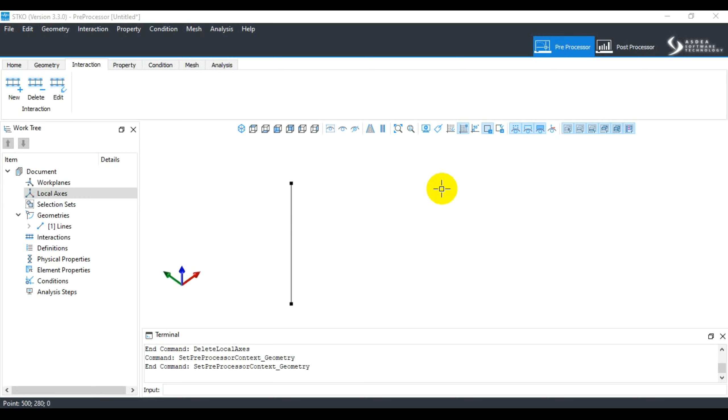Everyone. In this video, I continue the lecture series on STKO that I have started. And up to this point, I have covered the home tab, the geometry, the interaction. I also have done some discussion on the preprocessor module overall and post-processor.

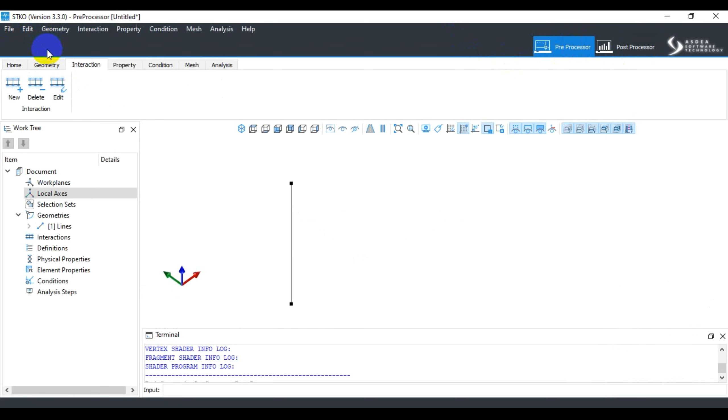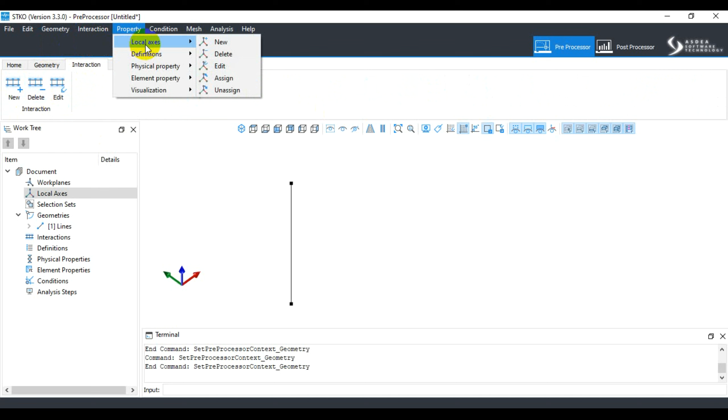However, this is now a detailed discussion on the STKO, and I have covered all these options, and some of these options are also covered in the discussion as well as this one. Now I am discussing the local axes, sorry, the properties module. And in the properties module, there are a lot of options available.

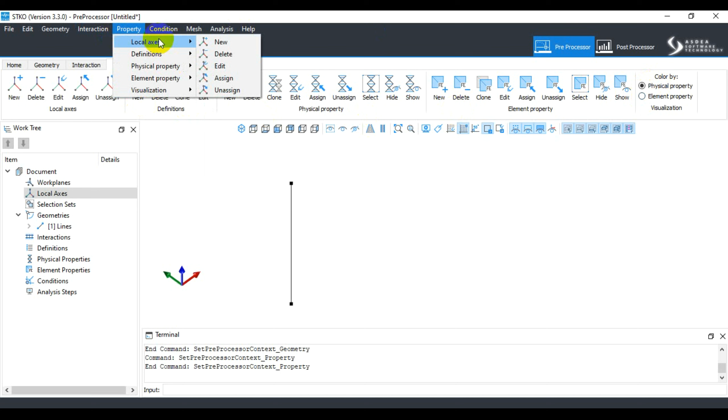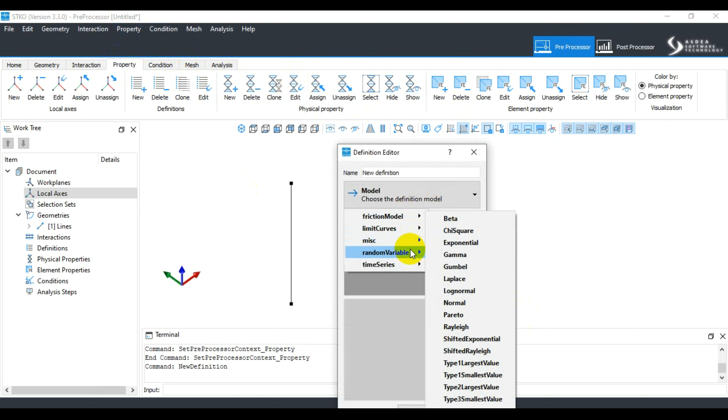And if we look at here, it is divided into five main sections: the local axes, the definitions, physical properties, element properties, and visualization module. So I will try to discuss them one by one, but at some points we have very detailed discussions on a lot of models, and it's very difficult at this stage to cover all in detail.

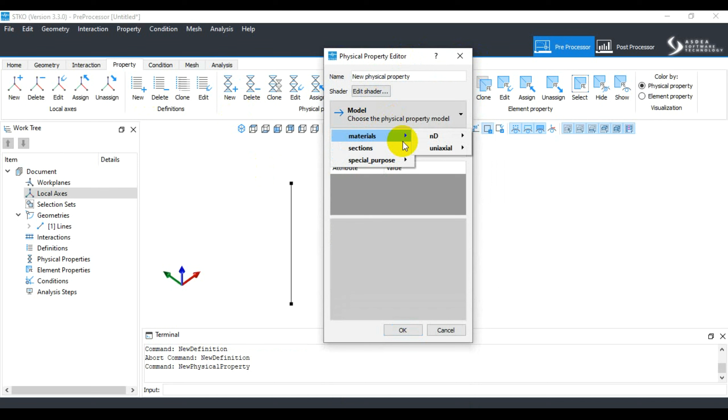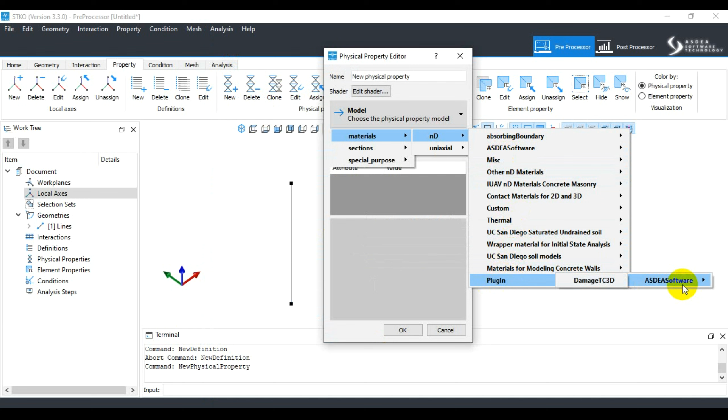So I will just give an idea, and after that I will try to cover them in the next video series one by one. Because if you focus on the material sections, we have so many details that are necessary to cover, and it's more than enough at this stage to consider them. So I will only discuss them, and then when I'm doing practical projects in this series, I will try to cover them one by one.

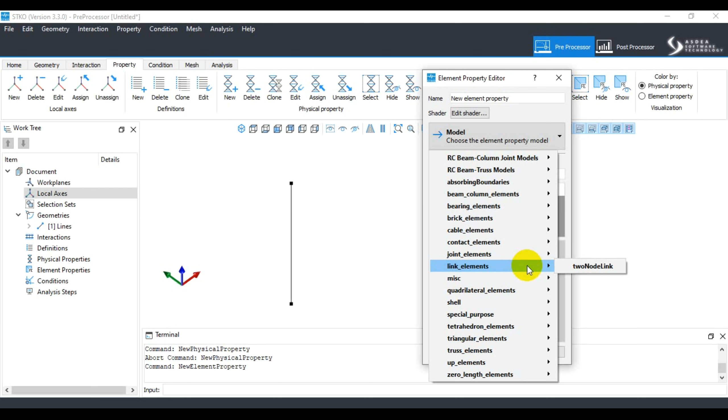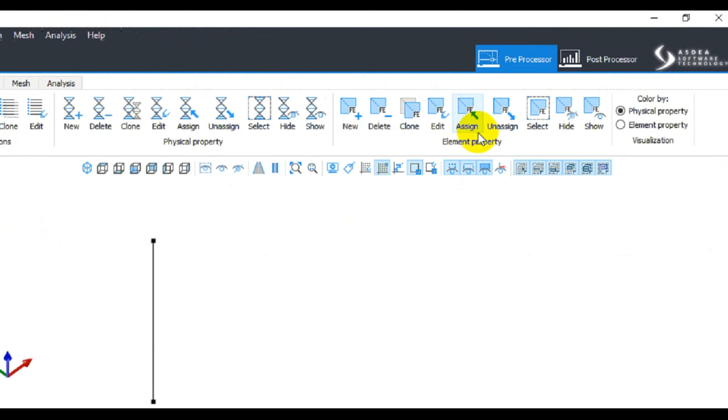So these are more than 50 to 60 videos that are required for defining all these sections. But this is the backbone of the STKO: these definitions, this physical property and this element property. Then the conditions are not so difficult, as well as mesh and analysis. If you learn this definition, this physical property and this element property, then I think you almost learn 70% of

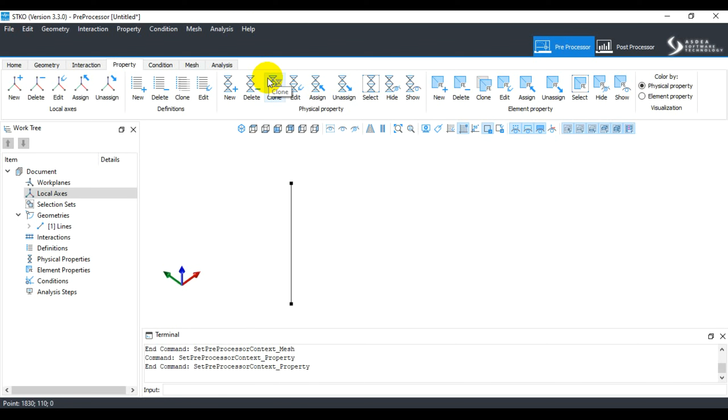STKO. And these element types require knowledge of OpenSees. So I'll try to just explain them in the property module one by one, and try to cover this in a single video before going further.

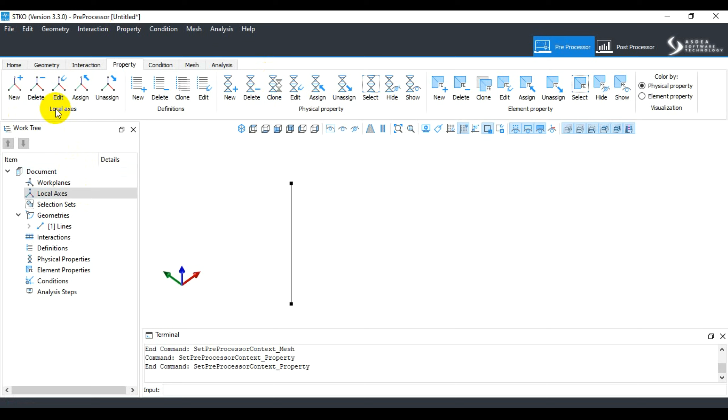So let's try to practice the local axes in this discussion. First, we need to understand why local axes are important in finite element analysis. The local axes are important for some reasons which I will try to explain here. The first reason for the definition of the local axis is the orientation of the element properties.

For beam elements and special types of elements, the local coordinate system defines the orientation of the element geometric and material properties, and this is important for accurate representation of the behavior of the element, especially for anisotropic materials or elements with directional properties like beams and shells.

Another thing is sometimes we need accurate representation of loads and boundary conditions. The local axis determines the direction of the applied load. It also helps in the determination of constraints and other boundary conditions on the element. For example, for truss elements, aligning these correctly with the element orientation is necessary for the analysis to accurately capture the real world behavior.

Also, for the interpretation of results, the local coordinate system is used to express computed results like stresses, strains, and internal forces in an appropriate direction for that element. So a misaligned local axis can lead to inaccurate interpretation of the analysis results. Also, for consistency across the model, it is important that all the elements in your FEA model have their local axes consistently oriented.

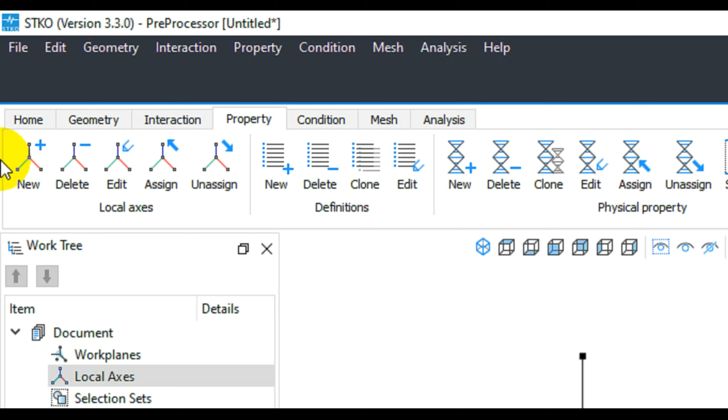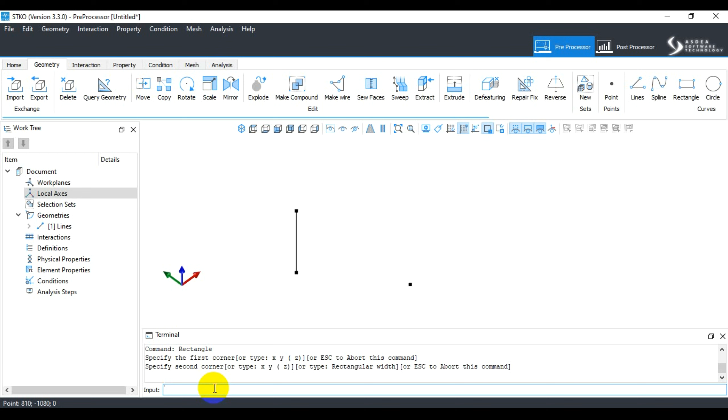For example, if we have an element, let's say we have this as a line element, and if I define a geometry, okay, let's define a rectangle. So for x-axis it is minus 25, for y-axis it will be minus 25, 0, and it is 25, 25, and 0. And let's just delete this one and zoom it to the extent here.

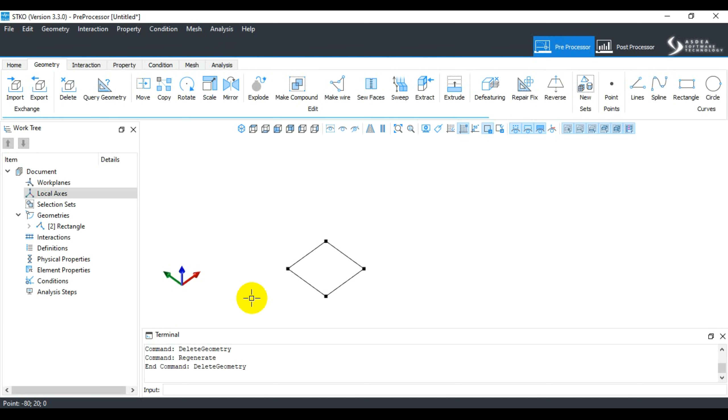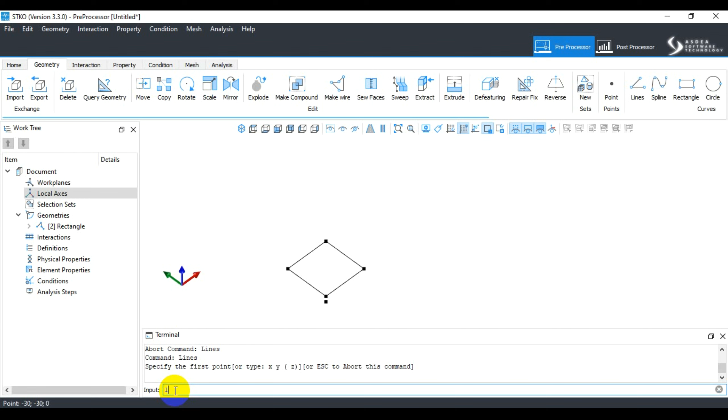Also, let's define a line. Let's go to geometry. Sorry, first let's define a line and call it with coordinates x 100, 0, 0, and 100, 0, 100. So let's say like this, and then 200, 0, 0 for the another point. And let's go to geometry and go to sweep.

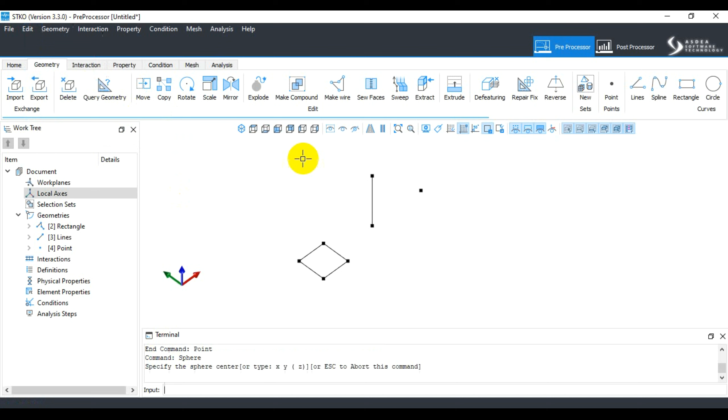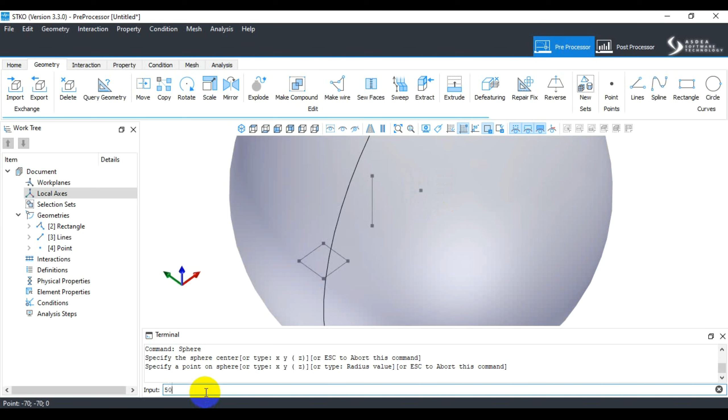We can define it any direction. So let's say I define 50 as a radius. Then I can move it if I want to move it. So I can then explore this to convert it to the surface. I previously defined all these things in a very detailed way. Anyways, let's go to geometry and surface and planar, this rectangle, and press enter.

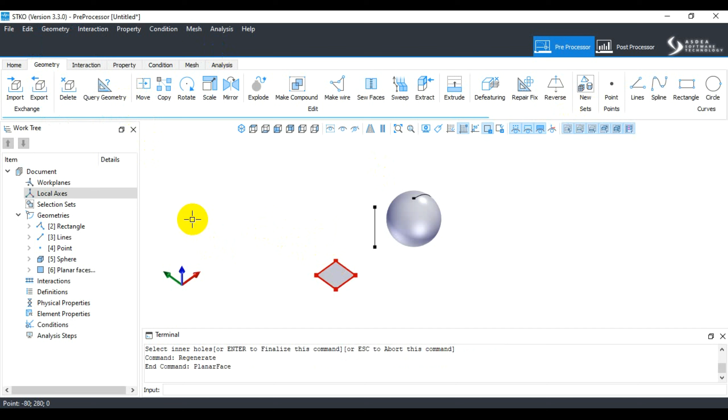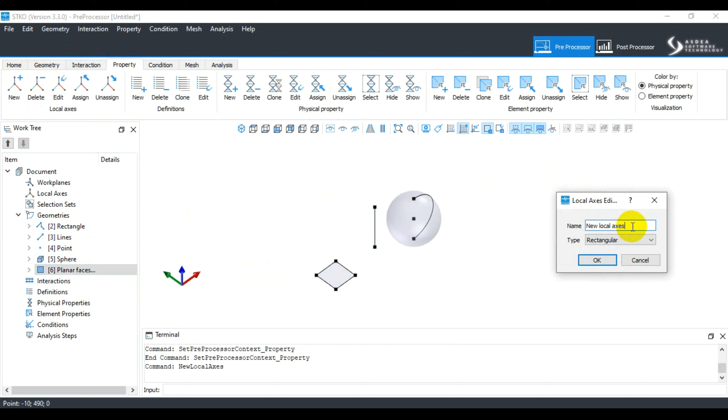So I define the surface here as well. So we have rectangle, we have this line, we have this point, and we have sphere, and we have plane surface here. Let's go to the property module and go to the interaction module here. Sorry, the local axis module here. And let's define a rectangular

local axis here. So for local axis, first let's try to define the local axis. So for example, if I want the global axis to be aligned with respect to a local axis, I can define 0, 0, 0 as an origin and x to be 1 as a first point. So let's say I have this local axis for now. Look at the second point, x-axis, so 1, 0, 0, and the third point is the xy plane.

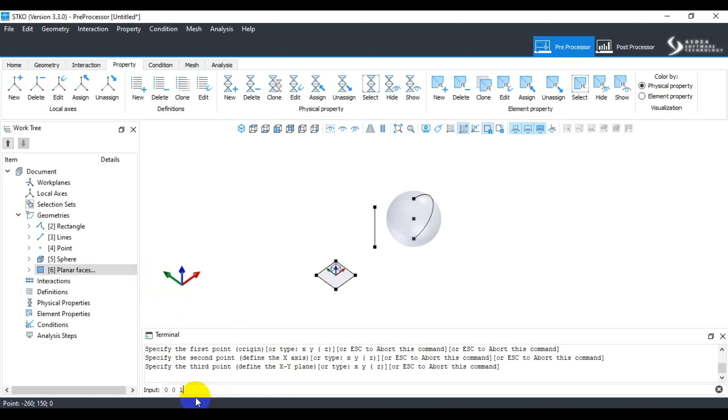So for xy plane, this will be 0, y will be 0. Let's make z 1, so it will be in this direction. If I make z minus 1, it will be in this direction. You can see here, right? And you can look at here, right? X-axis is defined here, so you can control it here. So for example, I make it 1, so it is in this direction now.

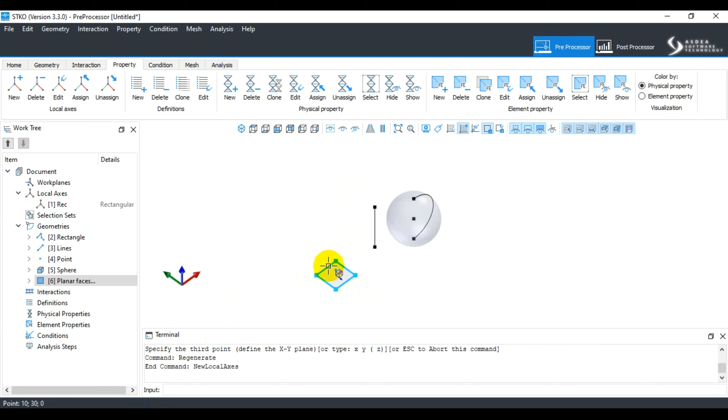So I define this local axis, and if I want to delete this local axis, I can define it from this region. Similarly, I can define another local axis, that is cylindrical local axis, and call it CYL, and the first point will be 0, 0, 0. The second point will be an x-axis, so 1, 0, 0, and the third point is the xy plane. So for xy plane, the third point will be 1, 1, and 0.

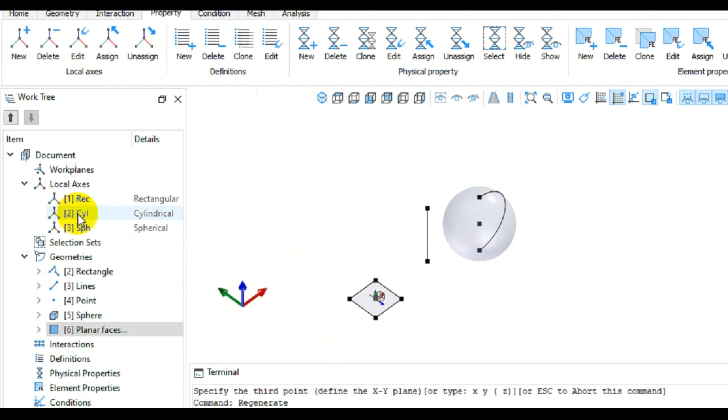So I define the cylindrical coordinate system as well, and similar to this, I can define the spherical coordinate system as well. So SPH, the first point will be origin. I'm just doing it like this way because I will assign it to any values that are assigned here. The second point will be 100, and the third point will be 110 to make it similar to the same orientation. We can rotate it, we can decide the axis properly, and STKO offers a good way of orienting them based on the direction it offers here. So we have three kinds of local axis definition here.

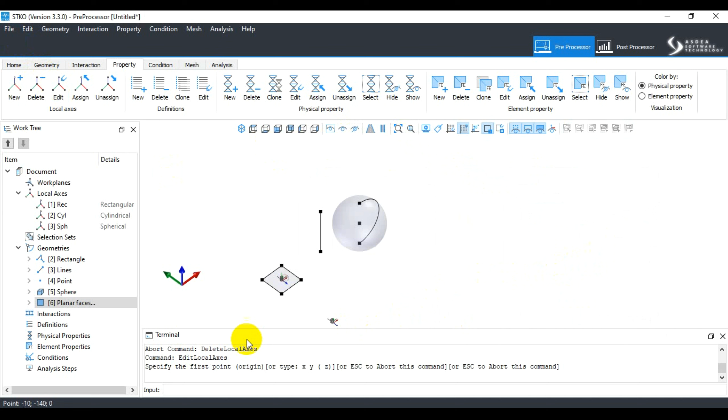If we go to delete options, we can select them and we can delete whatever we want to delete in this local axis definition. If we want to edit this, for example, if I click on it and if I click on OK, so we can convert it to a coordinate system in this way. And if not, then we can cancel that command here. So we can edit them as well.

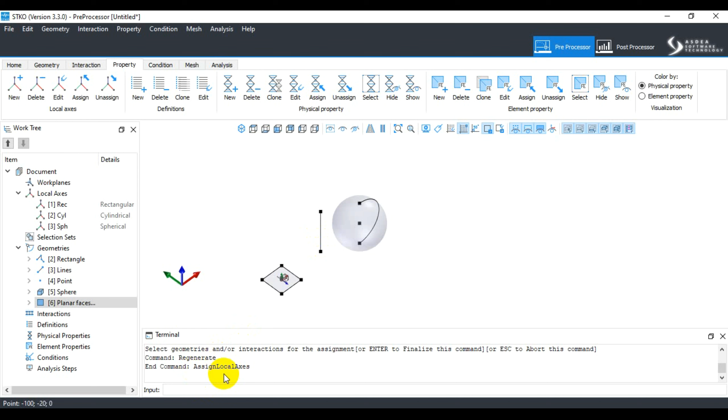We can assign them. For example, if I want to assign this rectangular local axis to any region, then this is assigned here. So it will show us the status here as well. And if I want to unassign them, then I select the local axis and I select the geometry and click on here.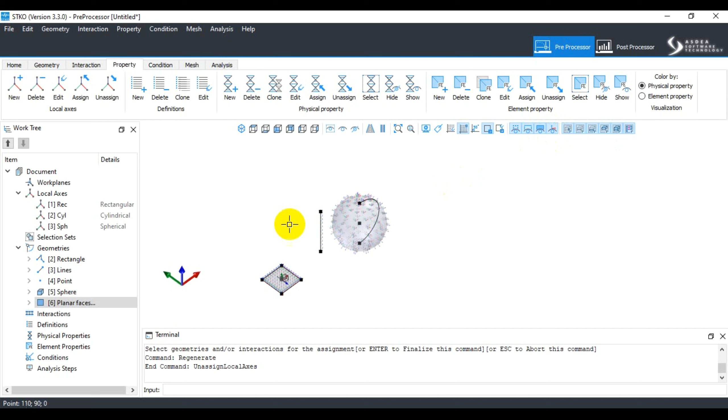So that's how we do it. And from this region, we can show the option of the local axis that are assigned to these regions here. So by default, the local axis will be with respect to the global axis, right? And if we assign a definition to any kind of local axis, then we can show them this way

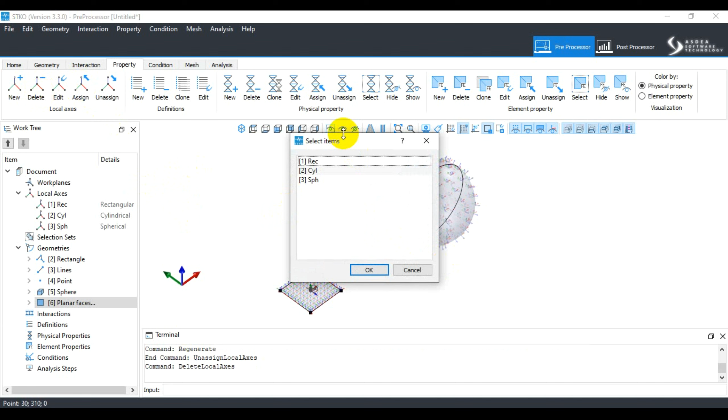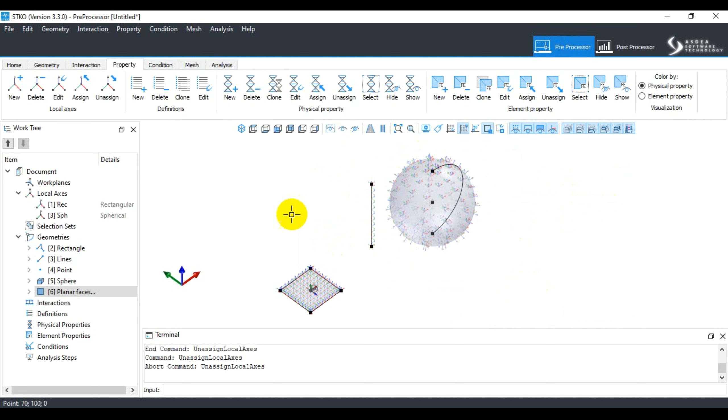as well. So let's say I want to delete the cylindrical local axis from this one and press enter. Then, sorry, not here. I want to unassign the rectangular local axis from this. Then we can see here that those are unassigned. So let's say I want to remove this one, right? Only one local axis is remaining, that is the rectangular local axis.

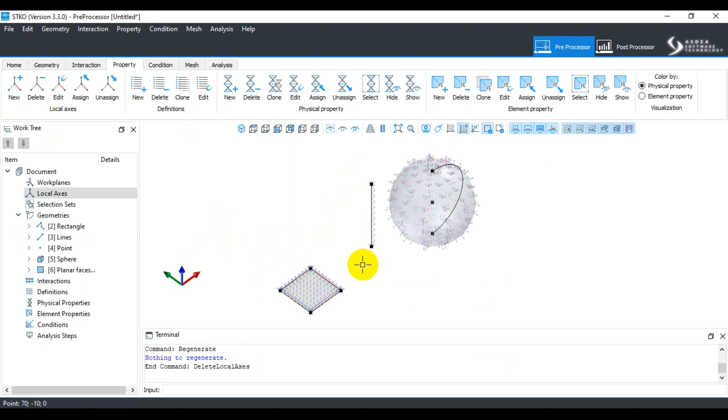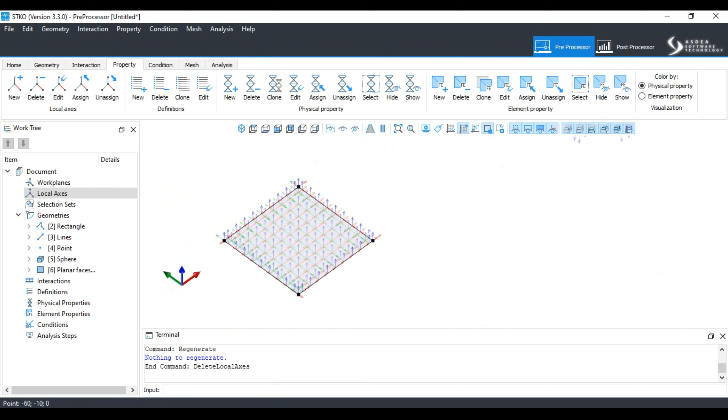And if I want to delete this one as well, I can delete it from this region properly. So now at this stage you can see here that the red axis is in direction with the local axis of the global coordinate system, and we can see them here, the coordinate system that we are observing here. So if we try to remove that, we can remove it as well. It will not create any trouble for us, and it will be easily removed.

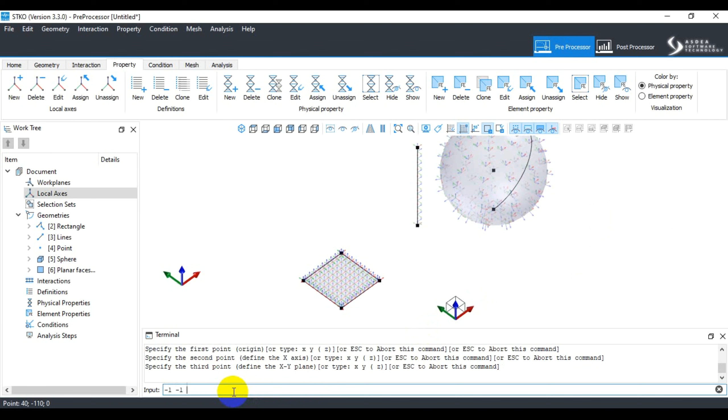Let's say I want to create a new rectangular local axis in the opposite direction, and then I define the origin. So this will be the origin, and for the second point to be on the x-axis, let's say I want -1, 0, 0, and in the xy plane I want -1, -1, and 0, and press enter. So this is completely opposite to the local axis.

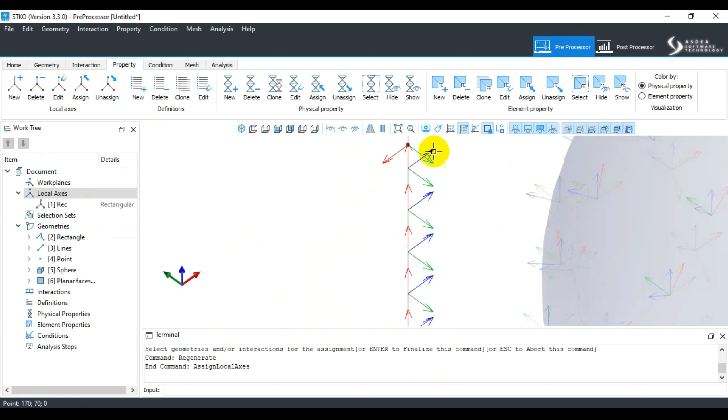And if I assign this rectangular axis to the other axis, then I can observe here that the orientation is changed with respect to the local axis that we have previously defined. So to the nodes, that local axis is assigned here. So you can create a new local axis, you can delete it, you can edit, you can assign, and you can unassign here, right? And this local axis will be available in the modeling tree in the details here, right?

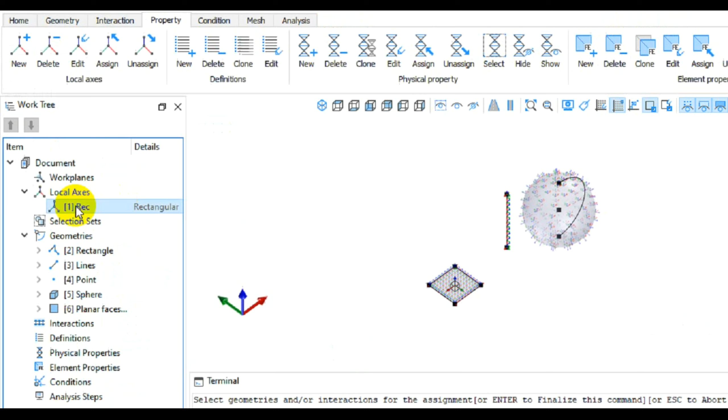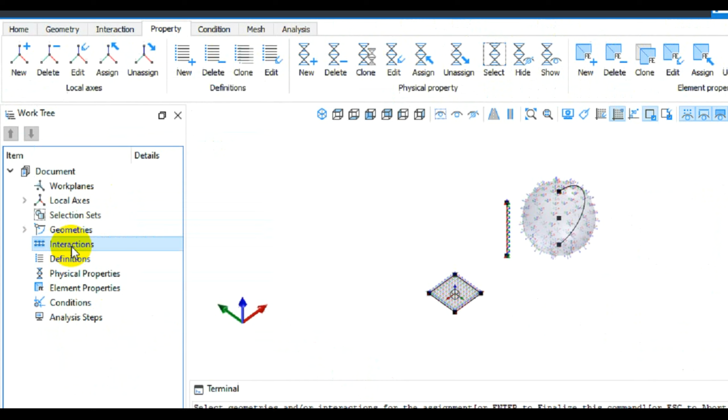So we have rectangle, we have line, right? And we have sphere, the vertices, and all these details that I explained previously, and all these definitions here. So work plane, selection set, local axis, geometries, and interactions are completed, and then we are switching to the definitions here. So it's your choice if you start from this region or if you start in the modeling tree. It's completely up to you, or if you want to look at here and do all these definitions here. So it's not a difficult thing to understand.

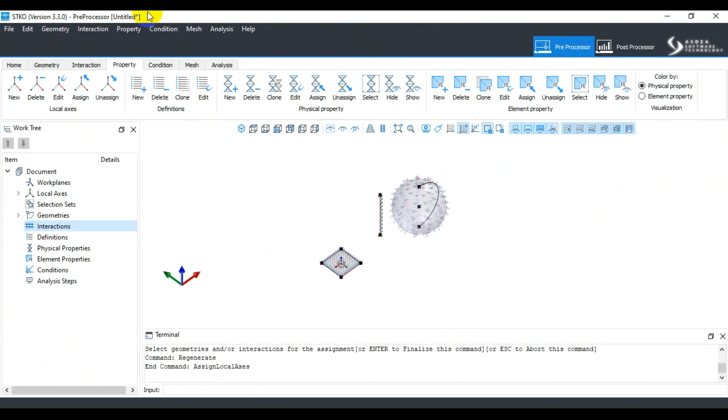First stage, you need to understand the process, how it works. Then in the later stage, when you get familiar with the interface of STKO, you will be able to work on it, and you will be able to follow any training series that are offered by the ASDEA software company and technology. So then you can follow the trainings very easily based on these conventions here. So this is about the local axis definitions, and then we have the definition.

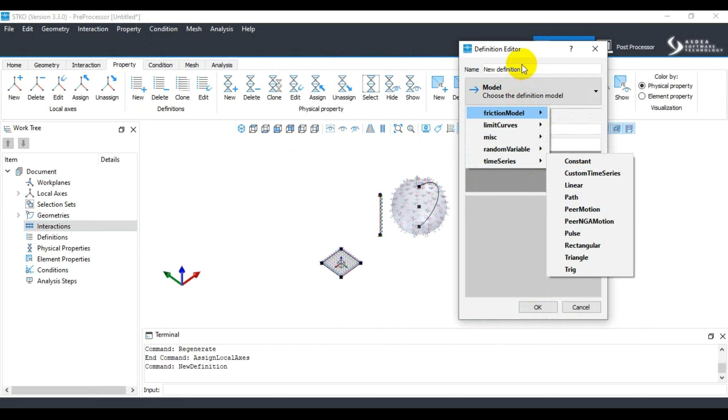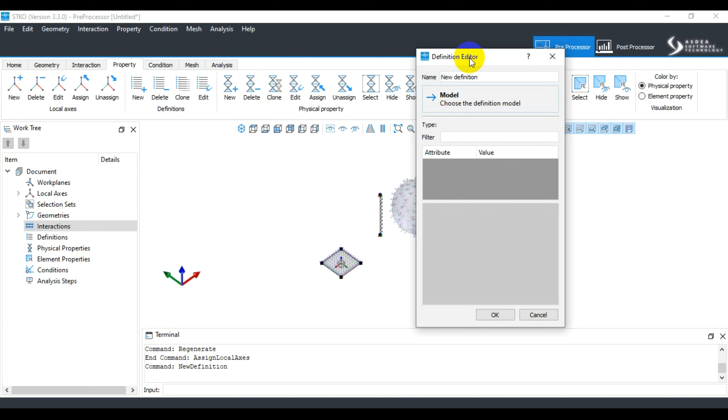if we switch to the definition, definition is related to the physical properties, and to define and assign the physical properties to the model, we can then go to the properties module and new property, where you can define the materials. And also you can work with the material, other attributes, filters, etc. You can do whatever you want with your model. So these are related to the physical properties, right?

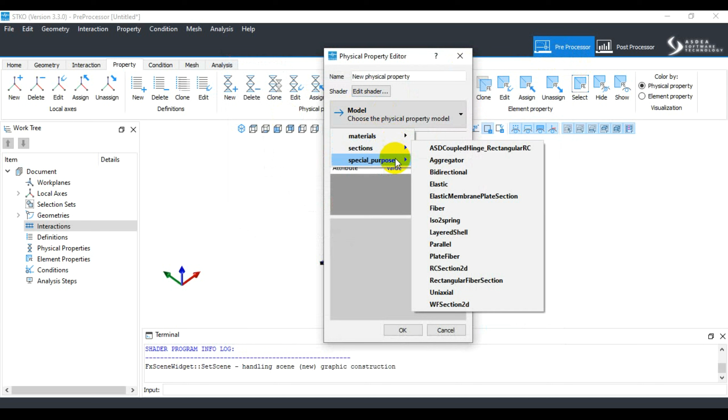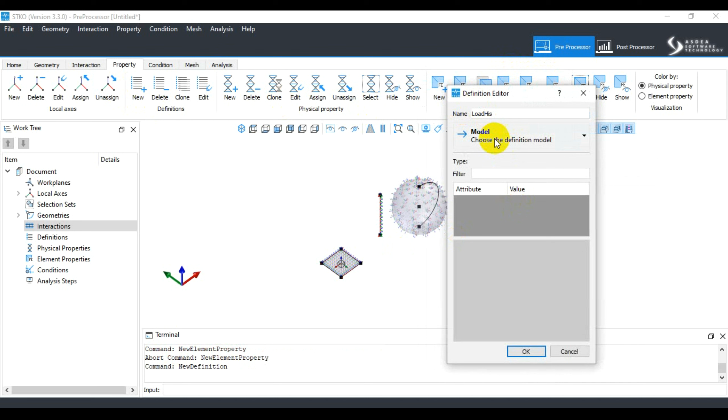And you can work with the shaders, you can change it however you want, whatever section you do, you can do it here. So for physical properties, all those materials etc. are defined. For element properties, all those special types of elements in the joints etc. you can use them. And if you have a definition like the time series etc., you can use it in your analysis. For example, if I have a load history, then I can define a definition here that is, for example, a time series, a linear, a path, triangular, whatever I want to do.

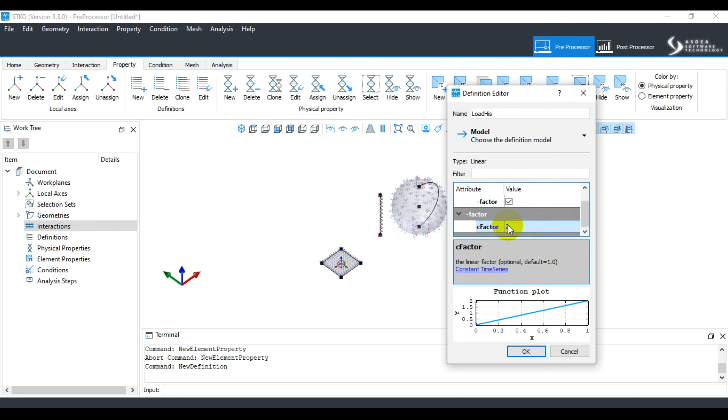And after taking some time, it will show us the factor, and we can assign the factor for it. So this is a kind of load that is defined here, right? For example, if I convert it to 2, it will increase the amplitude. And if you click on the button here, you will be directed to the information associated with this term that is present in the OpenSees documentation here.

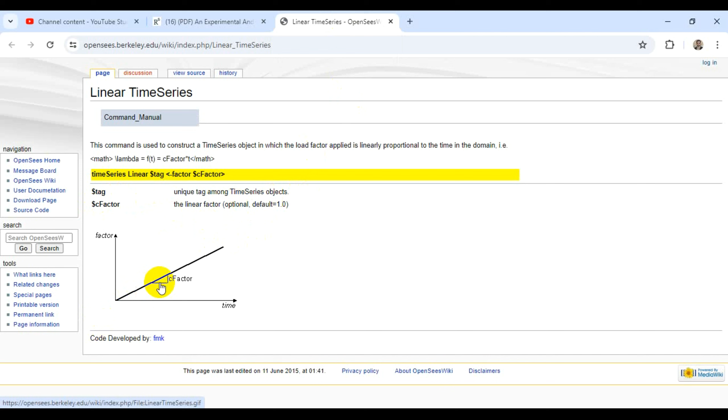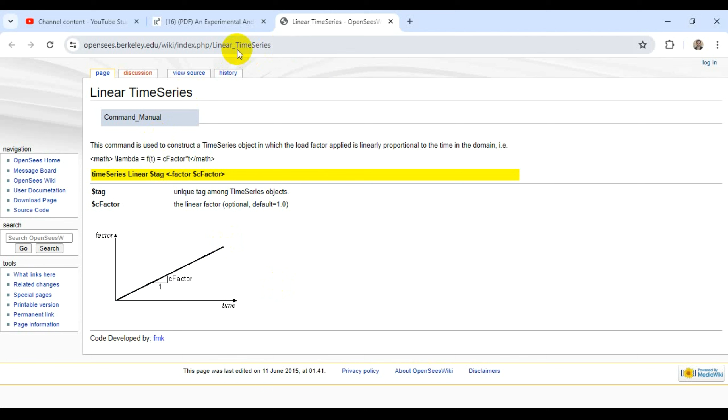So this represents in OpenSees a tag and a linear factor. So the linear factor is basically this factor, how much you are going to scale your amplitude, and this is the time series tag object here. So in this discussion, you can find a lot of useful information. So with definitions, you can then clone them. For example, if I define a time series here and call it time series linear, right?

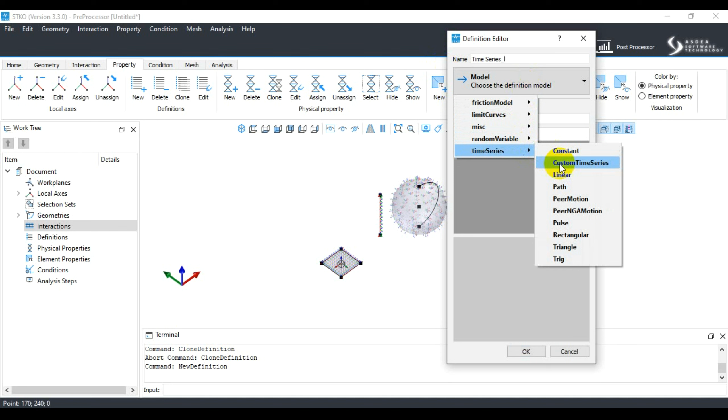And I went to the time series and I went to linear here, and I click on OK. So remember the code tags here, the color is gray, so it is not assigned here. If I want to clone it, so what does the clone mean? The clone basically means copying this one. So you can see here we have these copied definitions here. If we go to the edit series, we can edit those.

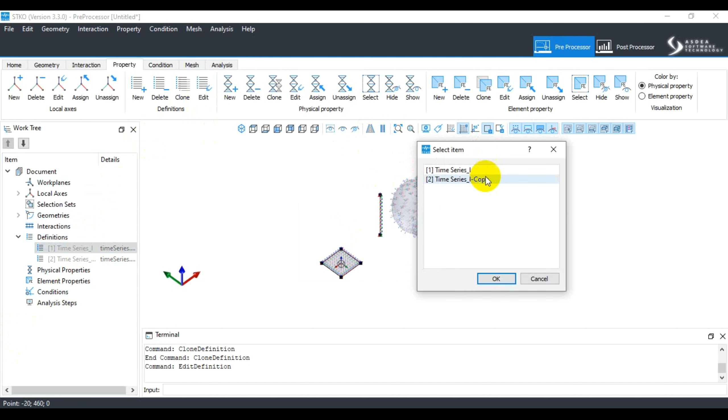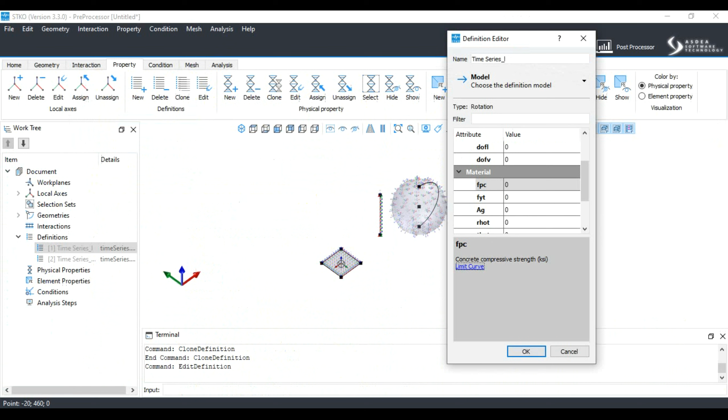For example, if I select this one and I switch to a Coulomb definition here, and I define this to coefficient of friction, mu coefficient of friction. If I switch to limit curves, rotation, I can define all this information in a detailed way, and then I can go to the relevant information available on the OpenSees documentation as well here. So this is a good way to understand all this information, and you can then do it as per your requirement. There is detailed information available when you are working with it on the model.

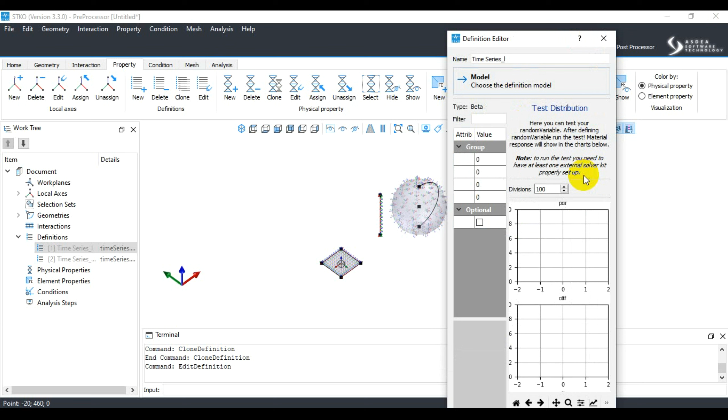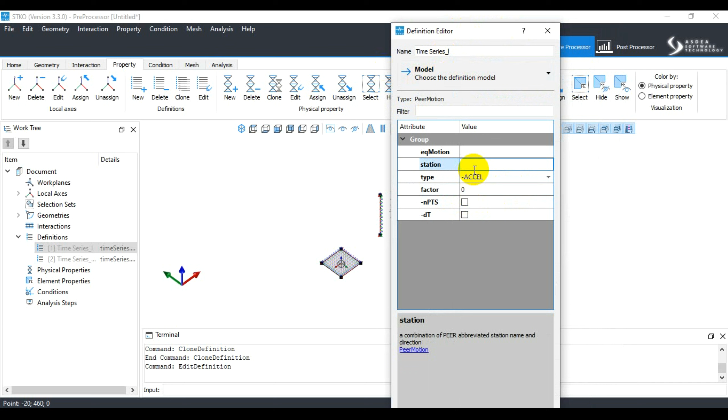So we have some random variable beta etc. that are related to the input properties when you are working with it for the loads etc. and other material definitions. Sorry, this is for the test distribution which you can work with, and I will in detail explain them one by one. For example, if I click on the PEER motion, I can select the station here. I can select the equation of motion. I can select the other details and all this information. And for more understanding of these terms, I can go to the PEER motion and the OpenSees documentation to understand what is going on in this model.

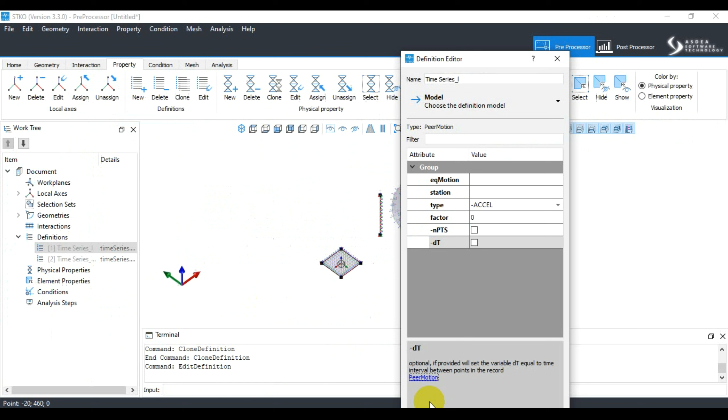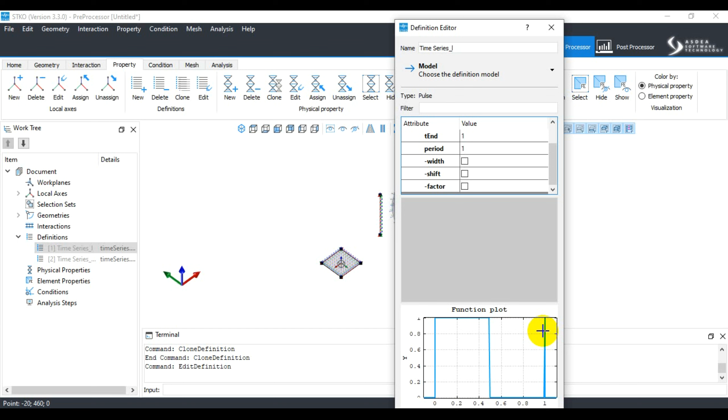So if you use this information, then you can use it in your OpenSees and STKO software. So the definition, for example, if you go to triangular, if you go to pulse, these are various kinds of definitions that are required for your analysis. So it's like amplitude, but it's not only associated with amplitude because the definition contains various kinds of information that are required. If it was only about the amplitude, then sinusoidal decay function and other functions would not be present in this. And so this is about the definition.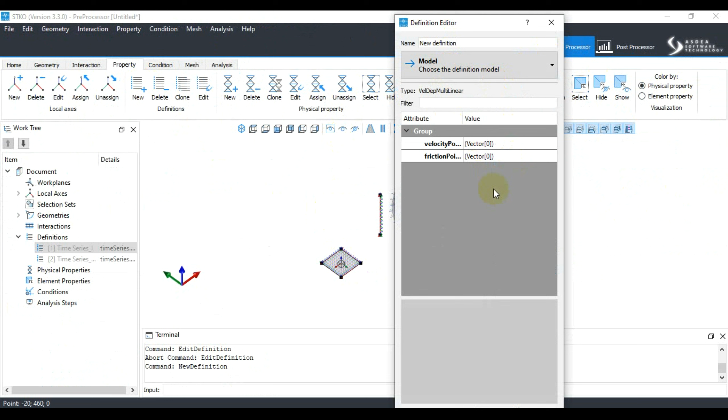I'm not going to do a detailed discussion on it. I have planned another video series in which I will explain these definitions one by one, and I will try to cover these in a separate video to have a better understanding of these. You have to then watch this video series. After that, these physical properties are related to the materials and sections.

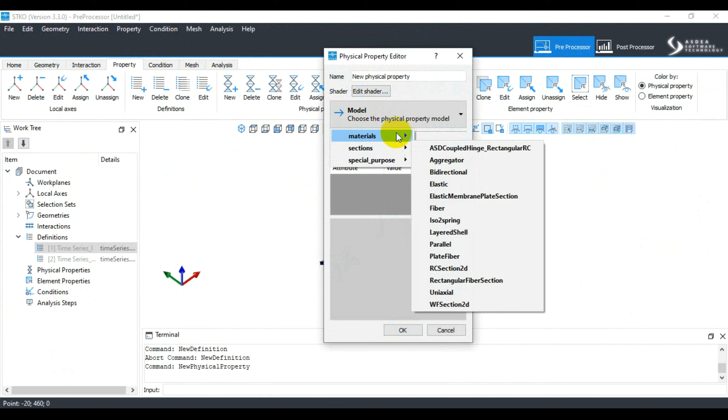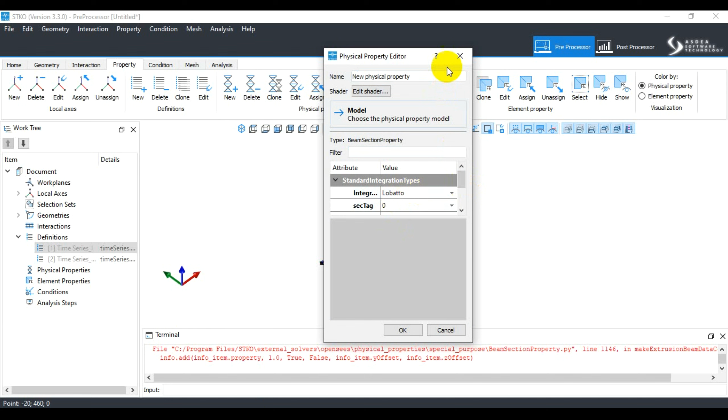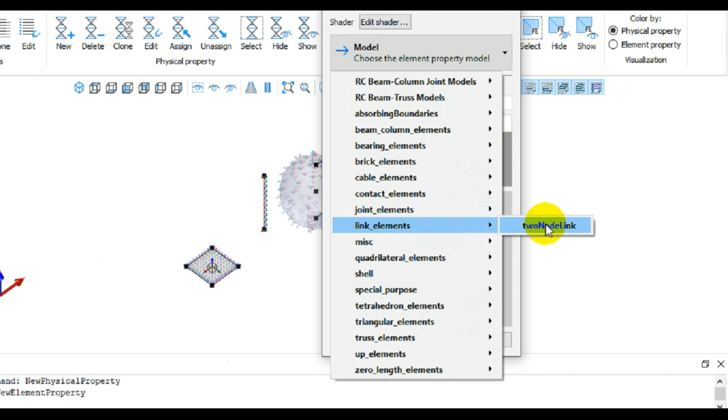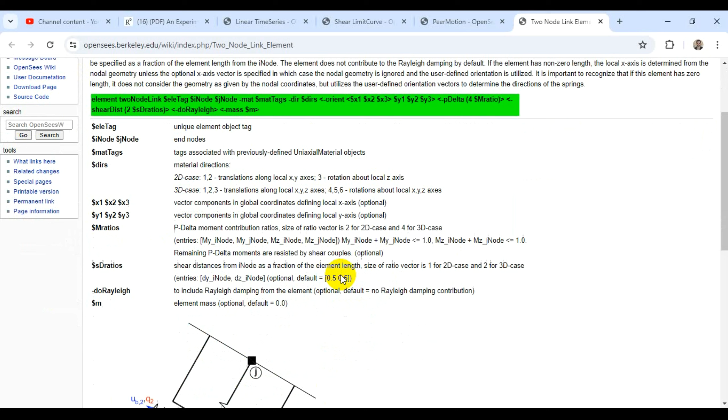Here we have the options for the special element properties editors, and we can use them. For example, link element, two noded link element. I mentioned this in the previous videos. Before that, I used the interaction as well. So for example, if we are using a two noded link element and we are trying to simulate the spring element, either we can use zero length element or non-zero length element. There is a detailed discussion on the OpenSees documentation website about two noded link elements, and this element is used in many research articles in their interaction definitions. So understanding them is very important.

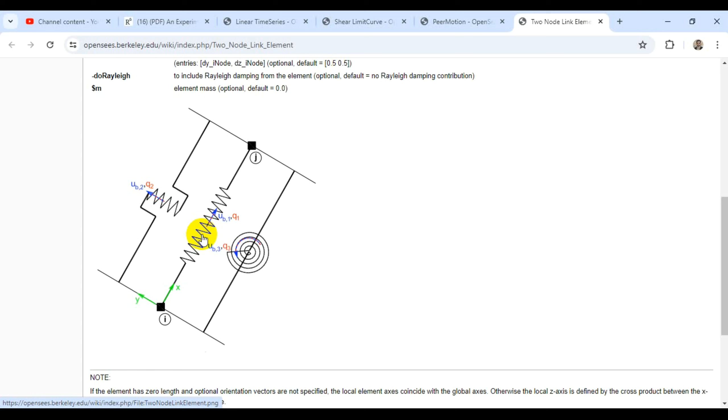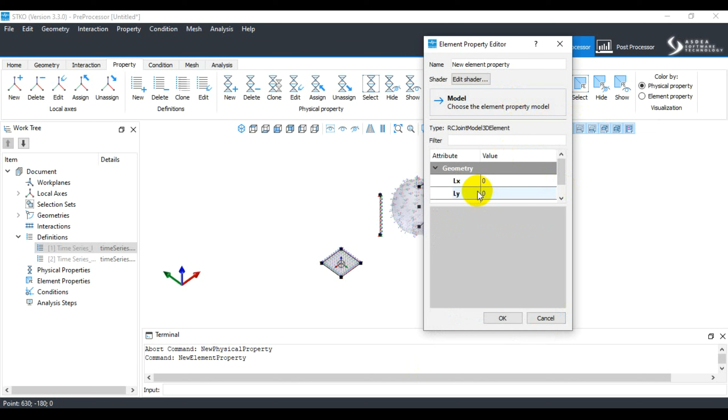You have to be very careful about the selection of the spring constant and dashpot constant for the definitions, and local axis association as well, because the assignment of local axis is very important. For example, if you look at this region, the I node and J node, if you misinterpreted the local axis, then you will not have any sensible results in your analysis. And we can use RC joint model 3D element and all that information associated with our model. After that, this is the color coding based on element properties and physical properties. Since we have not assigned any element or physical properties here, this visualization is currently not working for us.